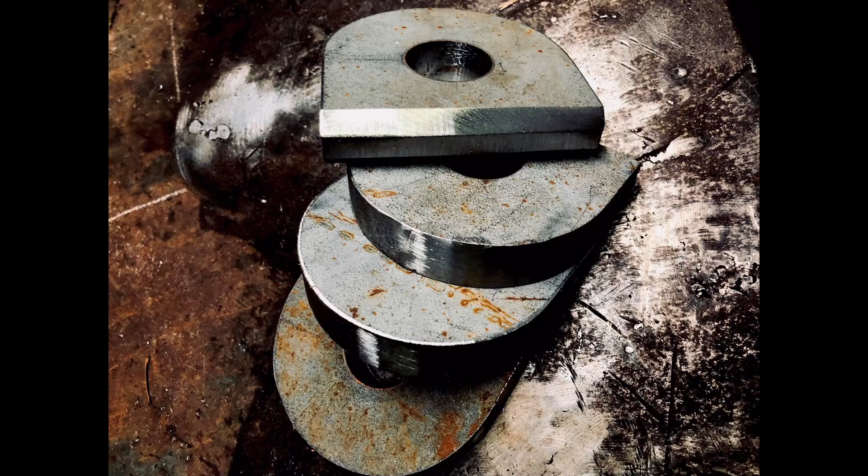Alright, looking at this, this is still kind of sharp and awkward. So what we actually want to do is jump into this dimension and flip that. Let's bring this back up to a little larger number. So this will bias it more vertically instead of biasing it more horizontal.

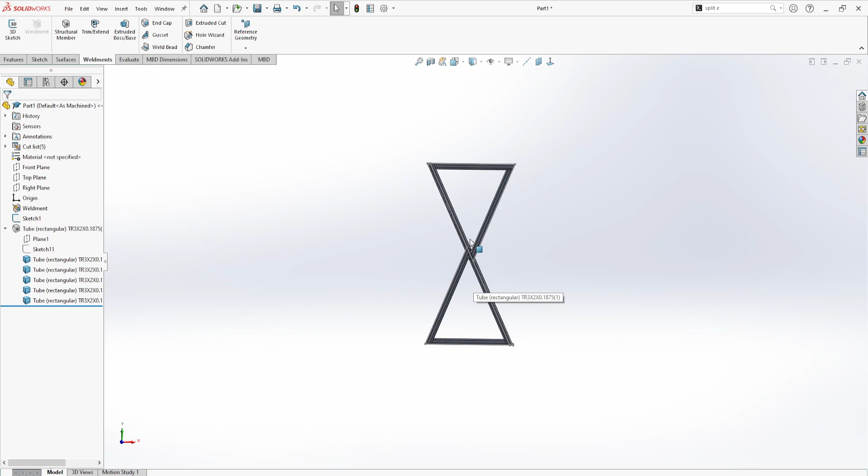So what we get is a lot more natural effect here, versus that. That's very sharp, awkward kind of transition.

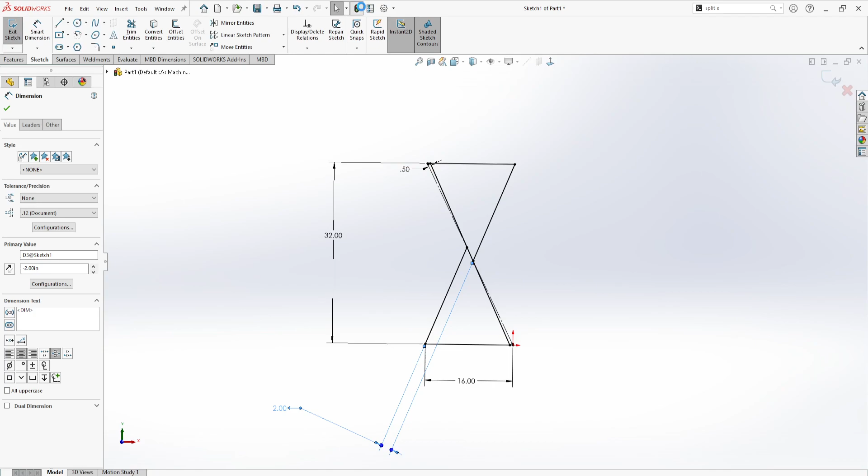Much better. So we wanted these to be more being pushed vertical, not being pushed flatter.

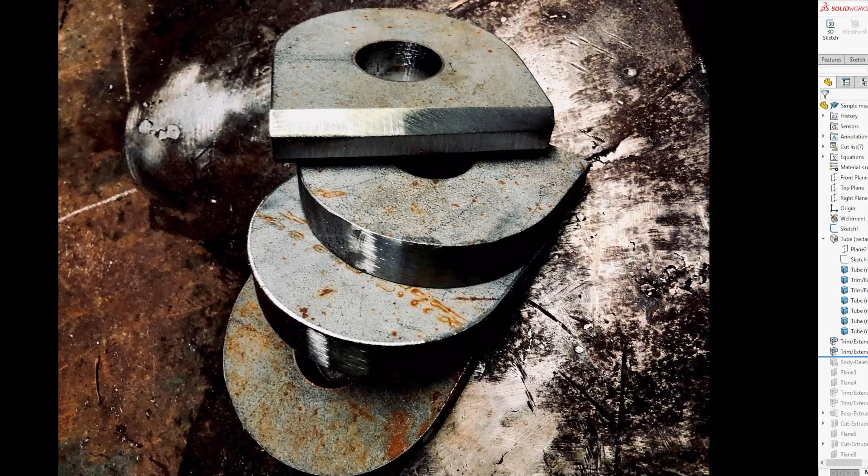Anywho, the next step in our process here is to clean this up right there. So let's hop back into our part. And to clean this up, let's go ahead and hide our sketch. We can see that this body continues into this leg profile.

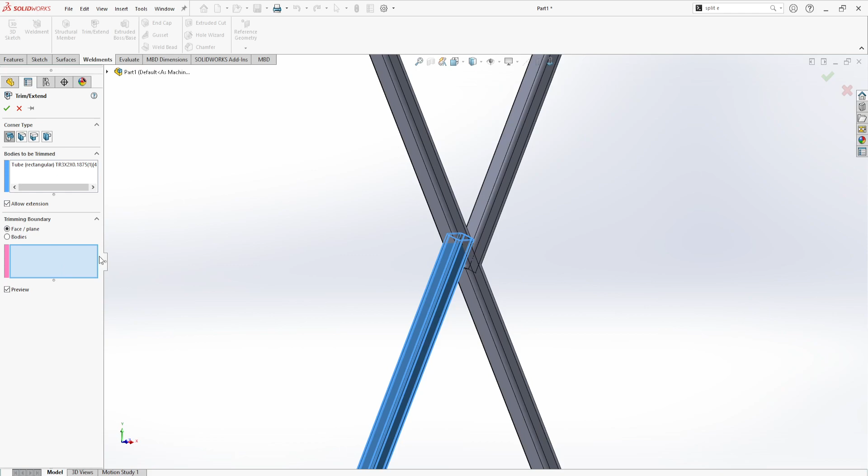So what you can do is in your Weldments tab, click Trim Extend. So bodies to be trimmed, let's get that gone. I had something already selected. Bodies to be trimmed, let's pick this guy. And the trimming boundary, let's click this face.

So that will make basically a plane that this cannot go past. So hit check, and we can see that that trims up nicely.

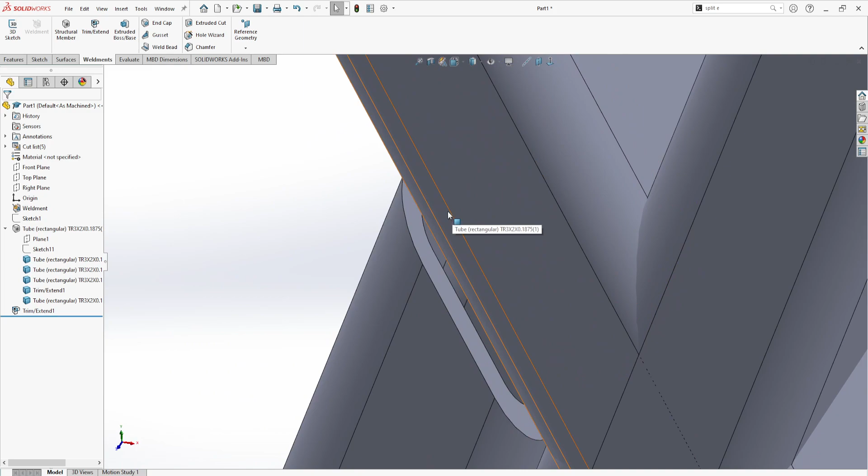And since this part is going to be cut on a bandsaw, I opt to not have this continue out because I want the true dimension of this cut. So I don't want this to be extended to the body. I want it extended to this face because that's how it's actually built in real life.

If you do the opposite, if you trim it to a body, well, that still didn't do it. Let's see.

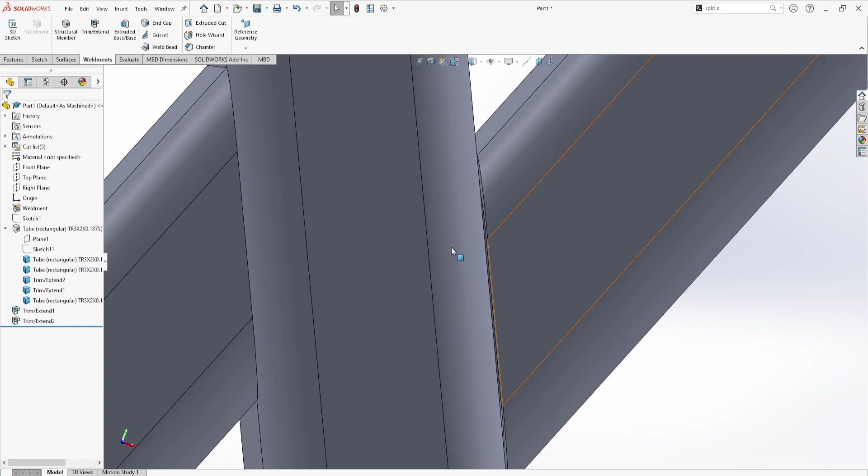Okay, they added a new feature. So now you can opt, so you can still trim it to a body, but you can allow for it to stop as if it's a plane, or you can radius it forward.

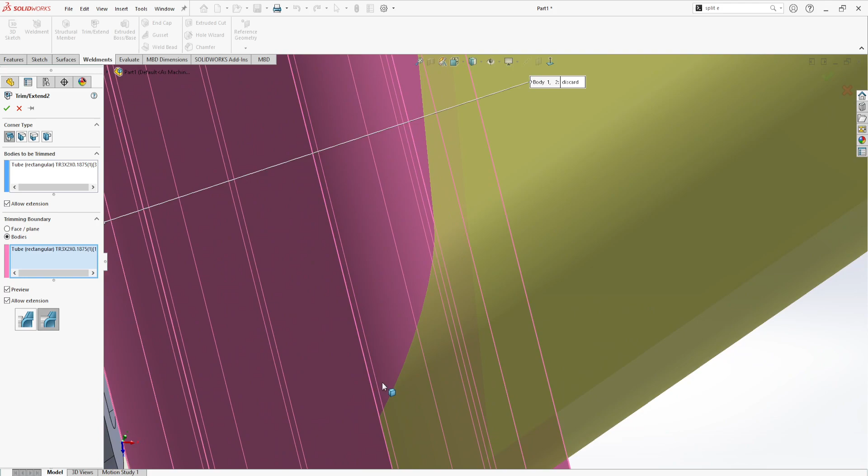This is the condition that I do not want. Because if you were building a race car roll cage out of tube, you would want this because you want to cope everything. But for table legs, you're just going to weld that.

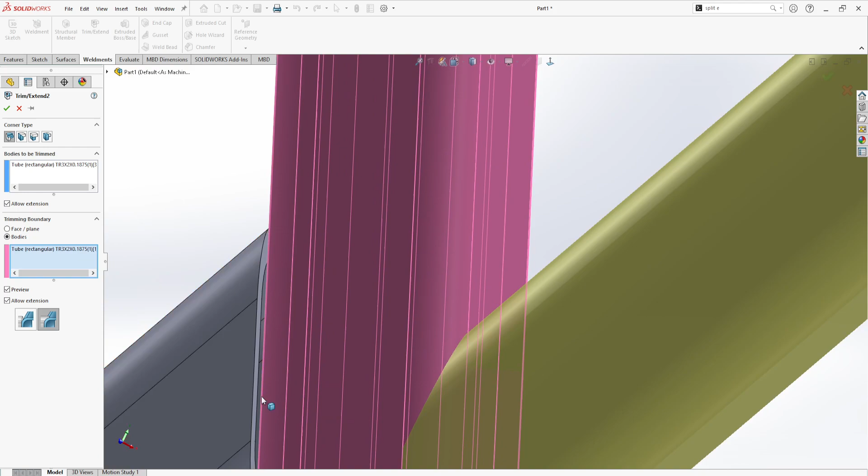You're going to weld this groove in here and then sand it flat. And then this allow extension, you can see it would be trying to put a piece down here. You could uncheck that and get rid of that extension, but let's just click that guy.

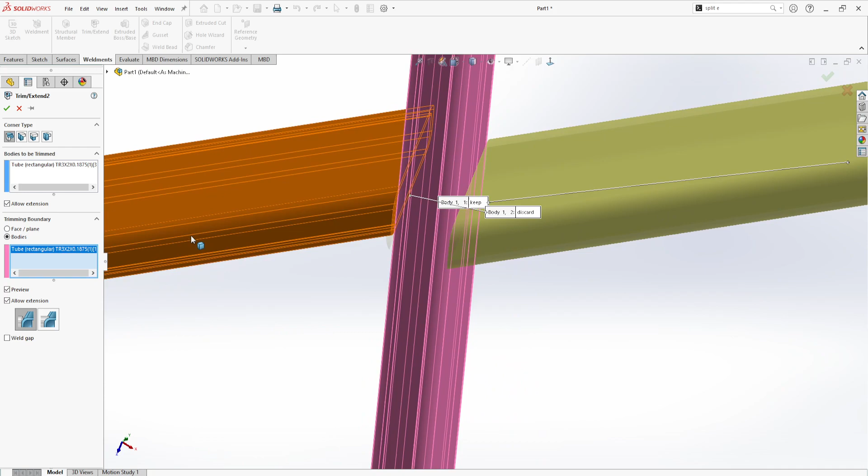And I'm going to, for the sake of doing it the same, just picking that face and hitting check. Now we can see that trimmed up that body nicely.

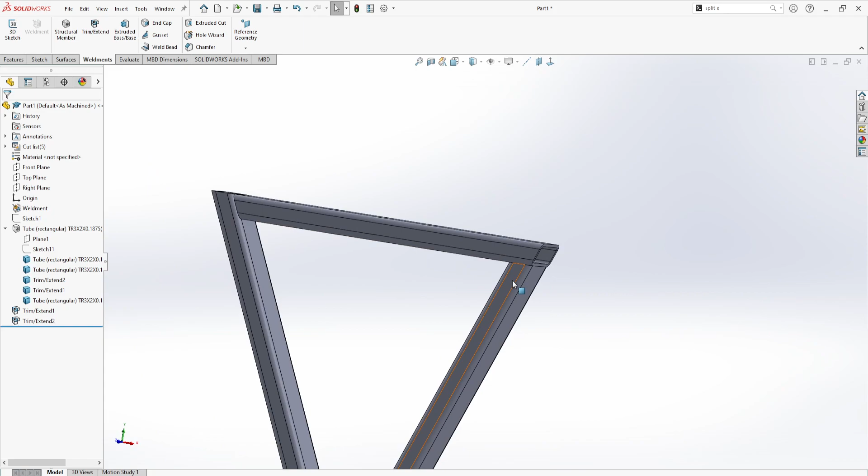And you can see that our bottom looks good and our top looks good, but we want this to extend all the way up. This one did it right.

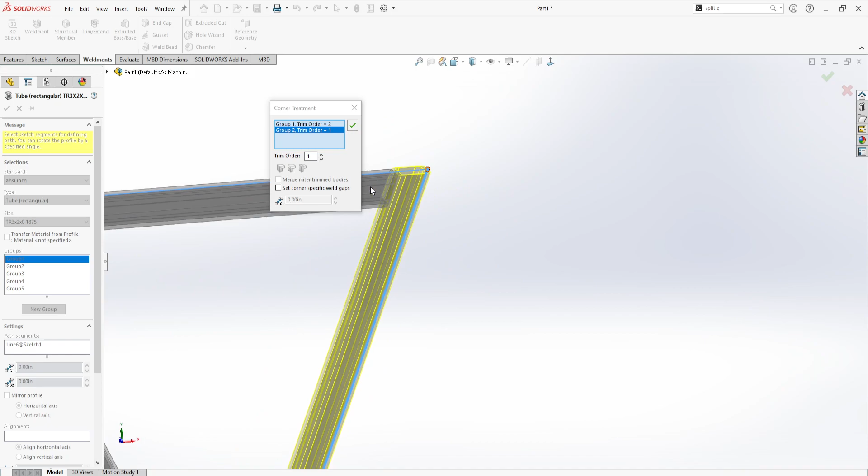So to get this, we can hop back into our weldment. We can click this joint and you can switch the order of trimming. So let's switch this and this. So that switches which one is the priority.

We can hit check, and now this inner piece is trimmed first. And now we have the top looking the same as the bottom.